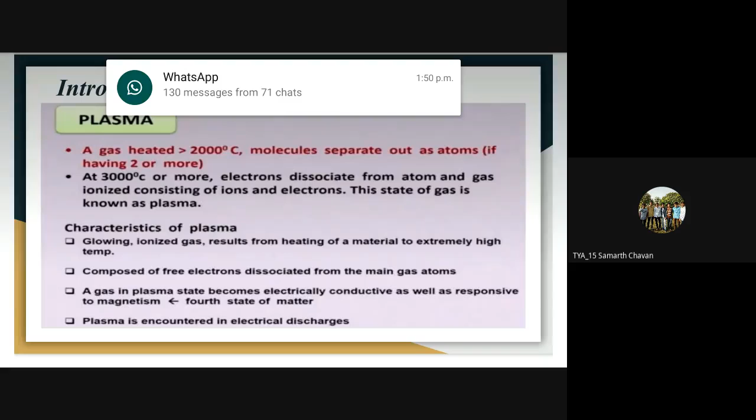If the temperature of molecules goes beyond 3000 degrees Celsius or more, then electrons will dissociate from the atoms and it will ionize. Ionization means it will consist of ions and electrons. So that state of gas is called plasma.

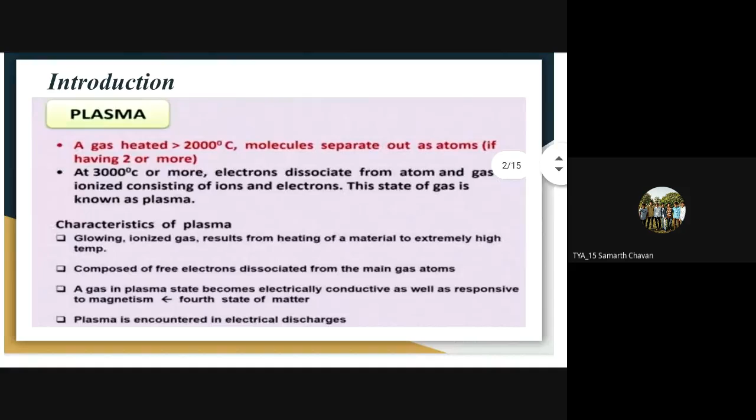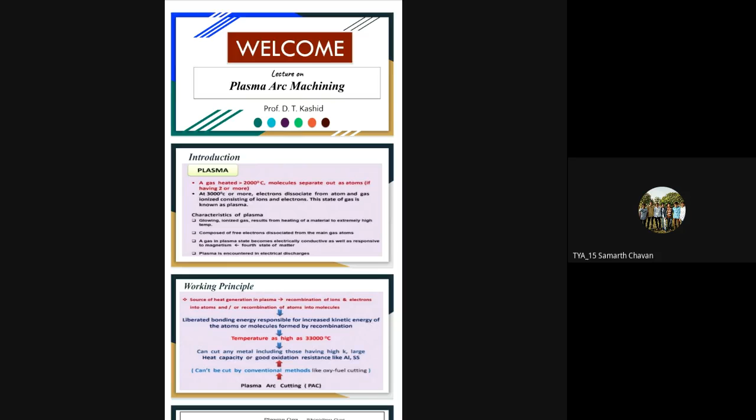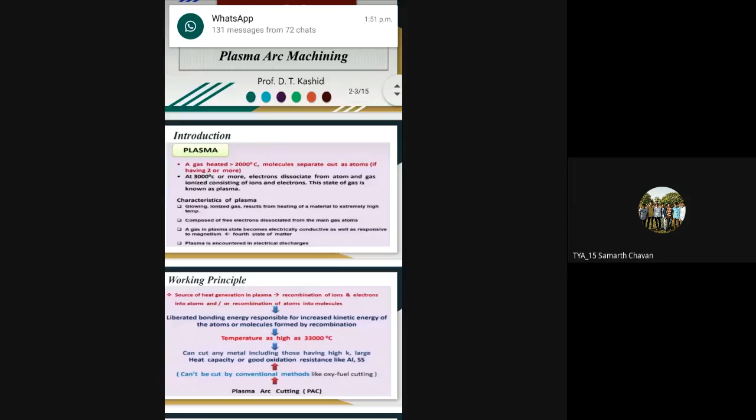Now, what are the characteristics of this plasma? It is a glowing, ionized gas, which normally results from heating a material to extremely high temperature. Plasma is normally composed of free electrons which are dissociated from the gas atoms. A gas in the plasma state becomes electrically conductive and is also responsive to magnetism.

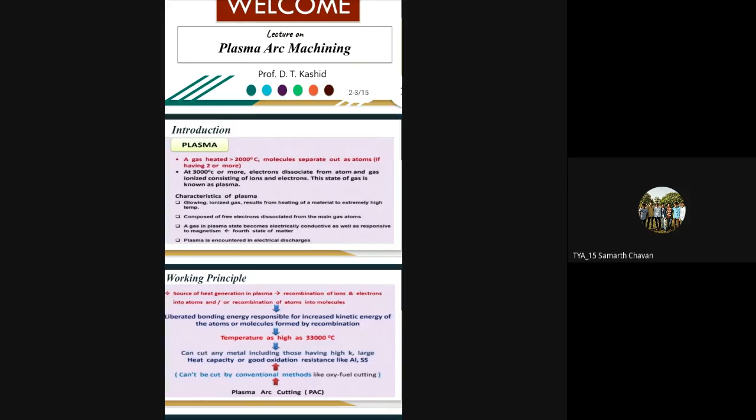This is the fourth state of matter, and plasma is normally encountered in electrical discharges.

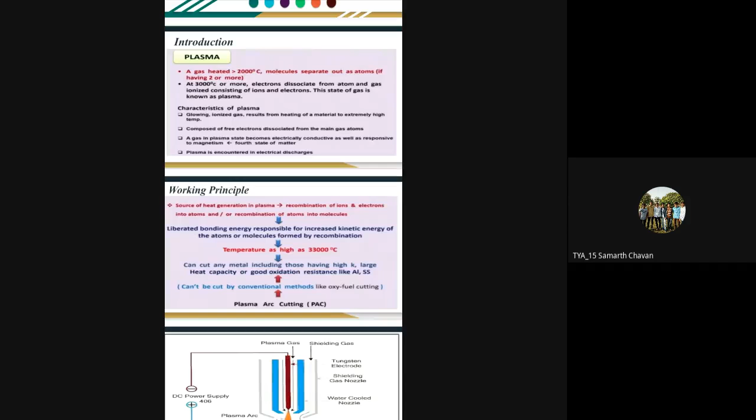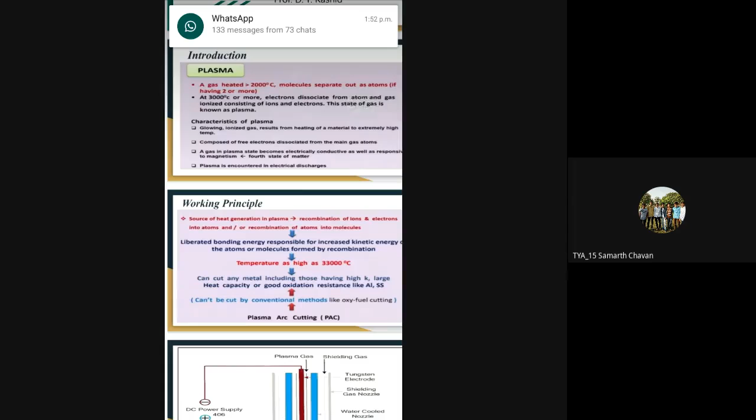Now let us look at the working principle. Normally we need a heat generation source for the plasma, and by supplying heat to the gas, you will get the plasma. The molecules will ionize and you will get ions and electrons.

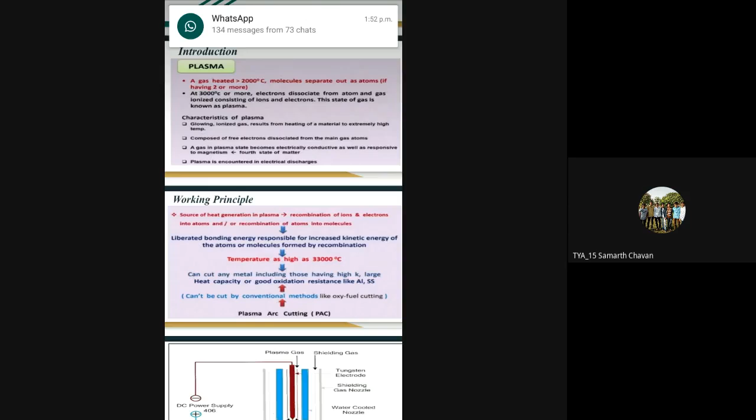That means positive, negative and neutral particles form the plasma. This plasma, having a temperature of more than 3000 degrees Celsius, can be used for cutting any metal, including those having high thermal conductivity, large heat capacity, or good oxidation resistance, like stainless steel or aluminum. So for that material, we can use plasma for cutting.

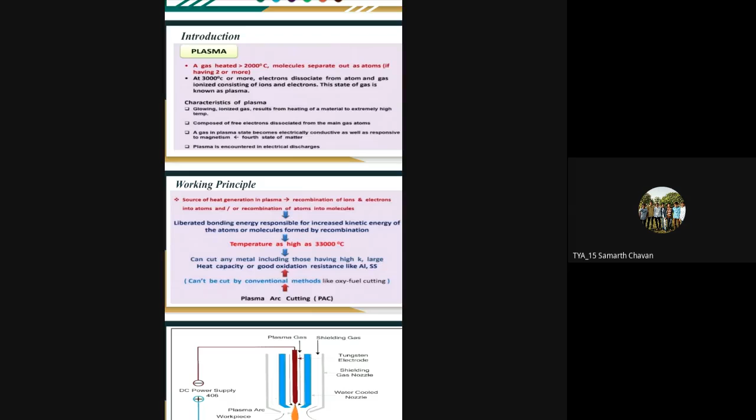But whatever workpiece material is not possible to cut using conventional methods, that material can easily be cut or machined using this plasma arc machining. Now you can see this diagram.

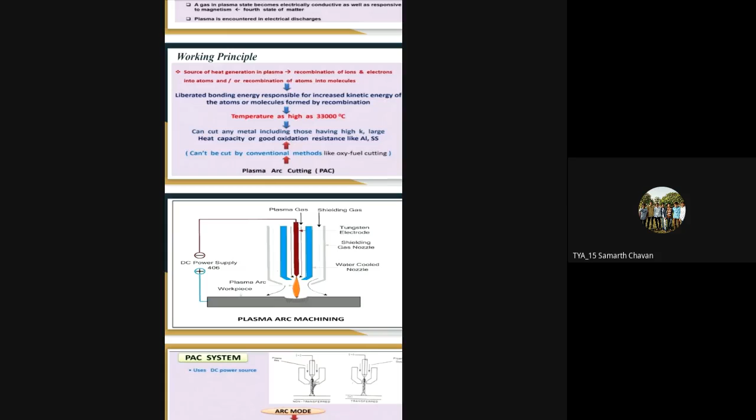We have the gas, and to heat that gas we require electrical current or electrical supply. For that purpose, the workpiece acts as an anode, and the electrode, whatever tungsten electrode is there, acts as a cathode. Then you get the gas, and that gas gives the plasma arc by hitting the molecules.

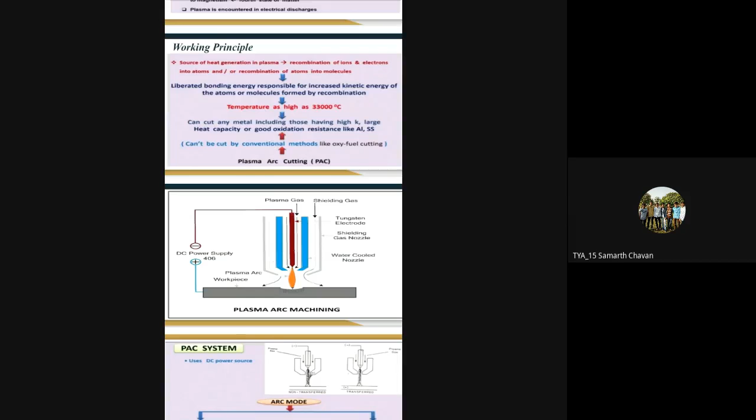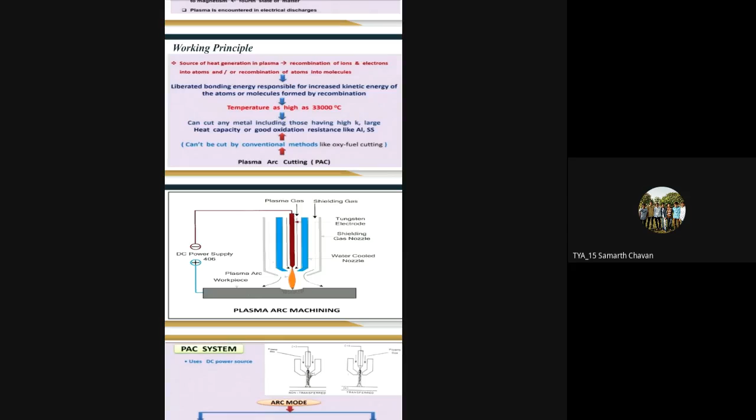Now, whatever electrodes are used, normally tungsten electrodes are used, and the gas is normally hydrogen or maybe nitrogen. Depending on that gas, your plasma arc will be generated. Again, the selection of the gas depends on the workpiece material.

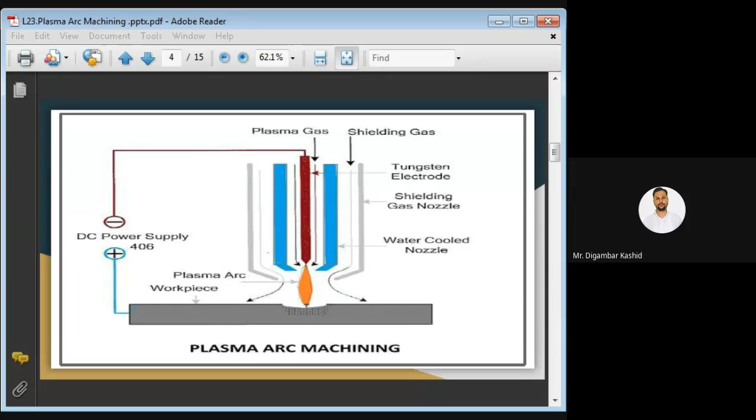Okay, now for the working principle, you can write down these steps also. How does the source of heating work in plasma? When these atoms are separated into ions and electrons, these electrons are going to recombine.

So this recombination of atoms liberates energy. That bonding energy is responsible for increasing the kinetic energy of the atoms or molecules which are formed due to the recombination of these electrons and ions into atoms and molecules.

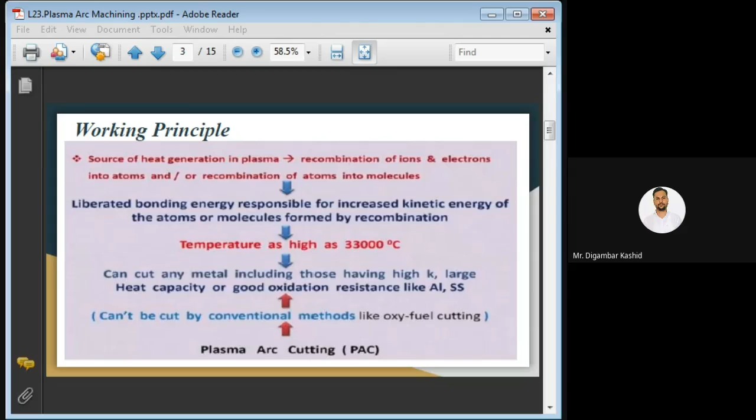Now talking about this diagram, we can see it in the diagram also.

So as we give the power supply to that system, an electric arc will develop between the cathodic tungsten electrode and the anodic nozzle. I repeat, the electric arc will develop between the cathodic tungsten electrode and the anodic nozzle.

And as the gas comes in contact with the plasma, there is a collision between the atoms of the gas and the electrons of the electric arc, and as a result we get the ionized gas.

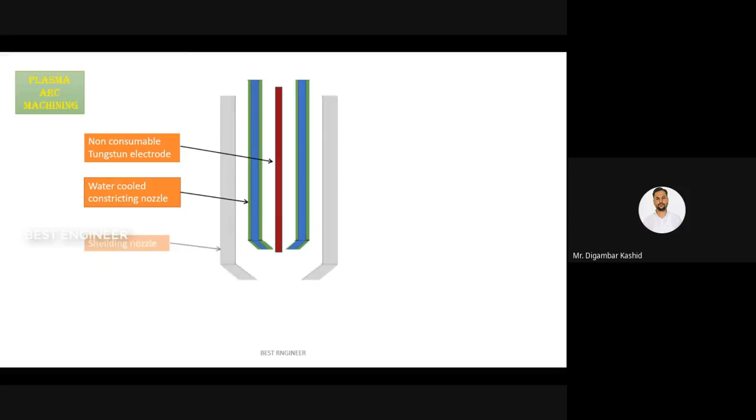So that tungsten electrode we are using, that is non-consumable.

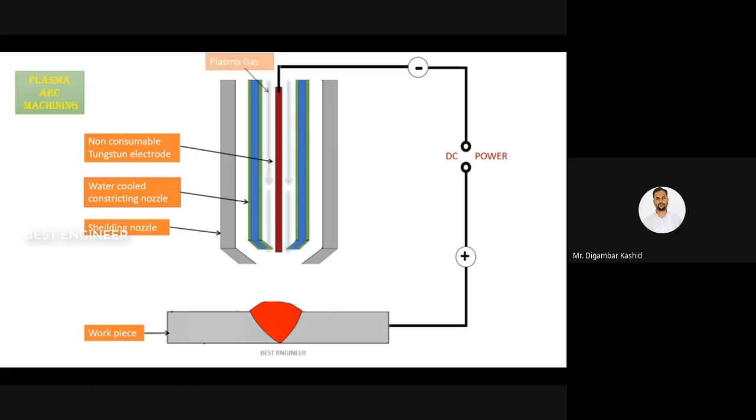And we are giving the power supply by connecting the negative terminal to that electrode and the positive terminal to the workpiece. And to prevent overheating, we have to use shielding gas and a water cooled constricting nozzle. And when your plasma gas comes in contact with the tungsten electrode, due to heating, there will be a collision between the atoms of the gas and the electrons of that rod, and you will get the plasma arc.

And then you can use that plasma arc for cutting, machining, or welding purpose.

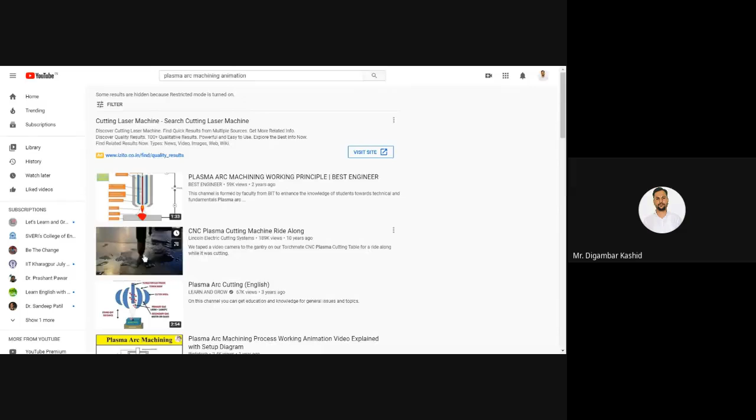This is a CNC plasma cutting machine.

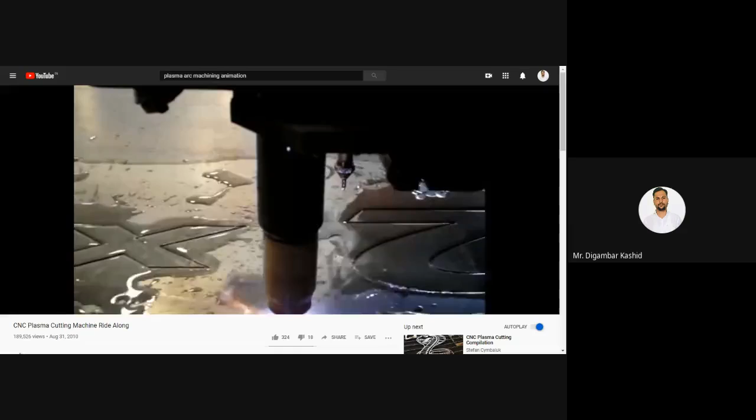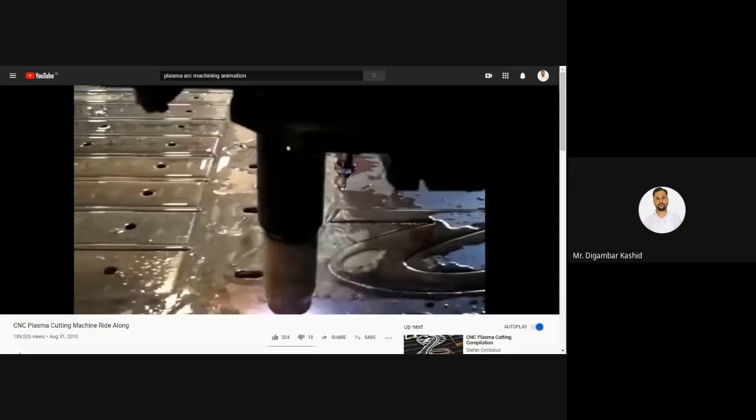Once again, I repeat, give the heat to the plasma gas. We require some heating medium or heating element, so tungsten electrodes are used.

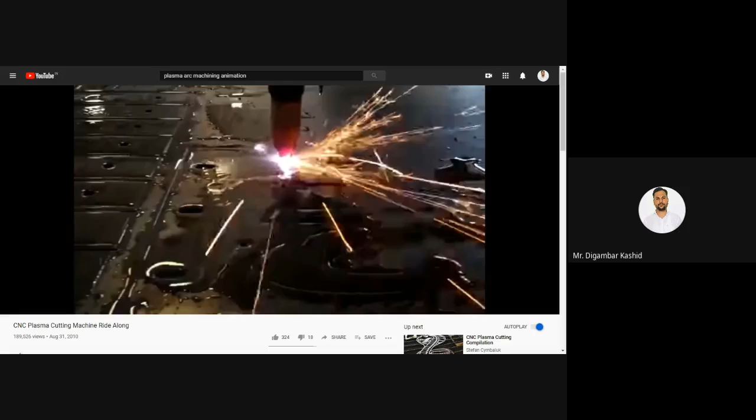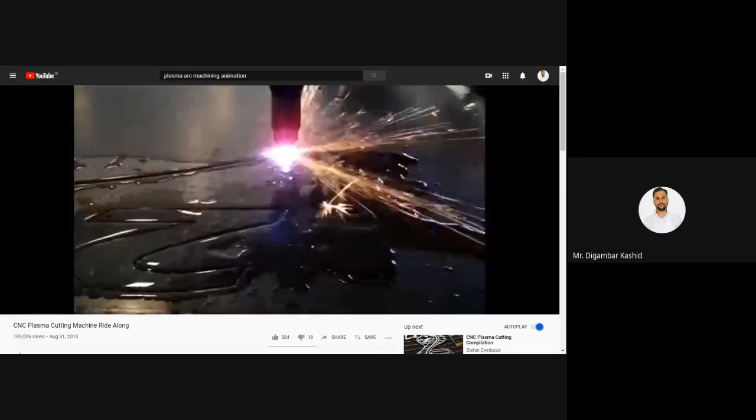Due to that heating, the molecules of the gas separate out as atoms, and those atoms again into ions. If your temperature is increased above 3000, that time you will get positive ions, negative ions, and neutral particles.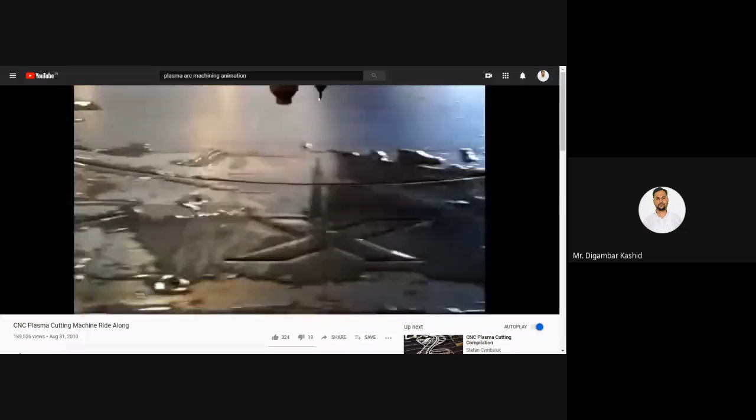So some atoms will get dissociated, and the gas becomes ionized, which consists of ions and electrons. That state of the gas is called plasma.

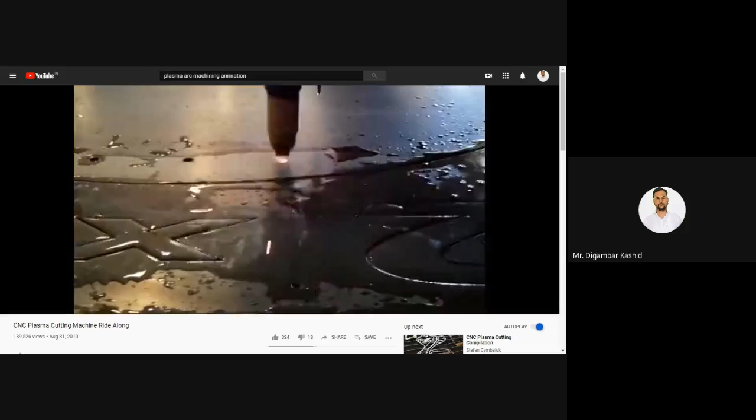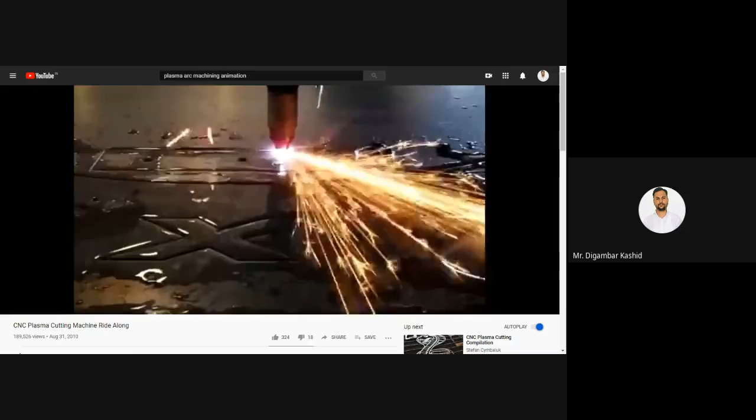Don't forget that the temperature of the plasma can be of the order of 10,000 degrees Celsius. When such a high temperature source reacts with any workpiece material, the workpiece gets melted, and maybe even vaporized, and finally cut into pieces. So many metals like aluminum, stainless steel, having high thermal conductivity, high heat capacity, or good corrosion resistance, can be cut or machined using this process.

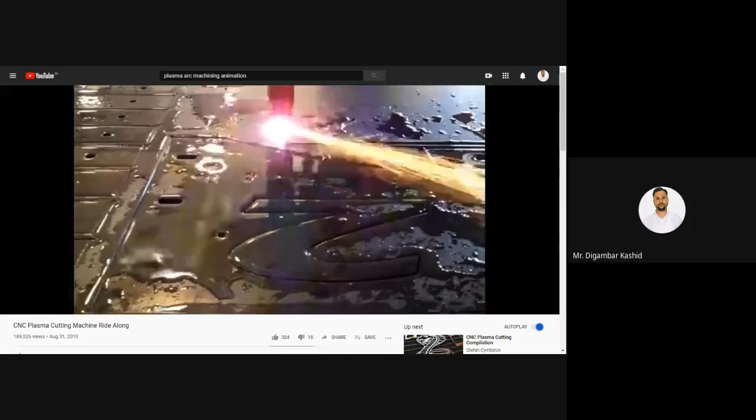As a result, such metals cannot be cut by conventional techniques like oxyfuel cutting. But these types of materials can be easily cut by using plasma arc machining or plasma arc cutting method.

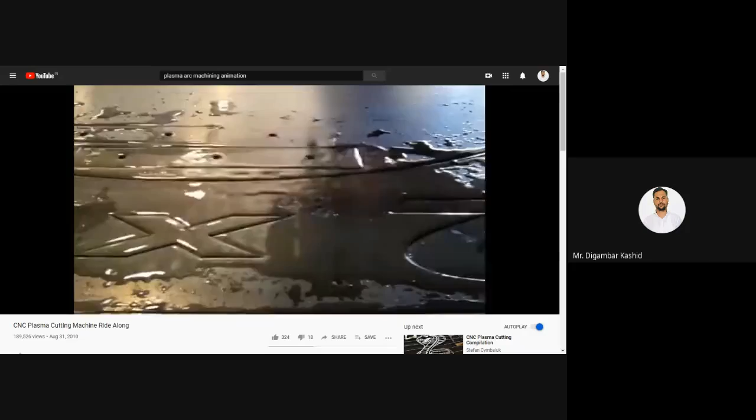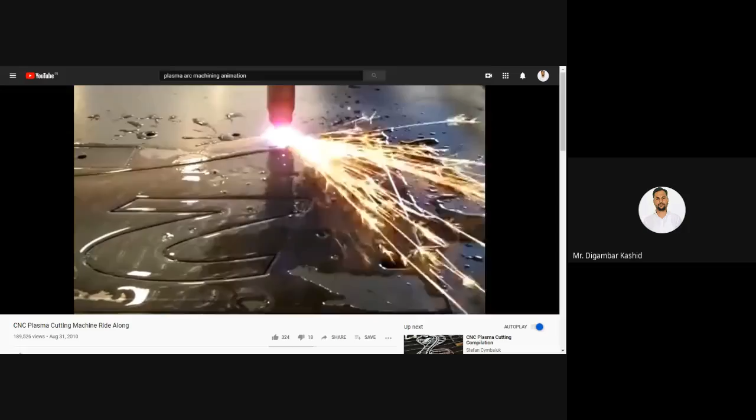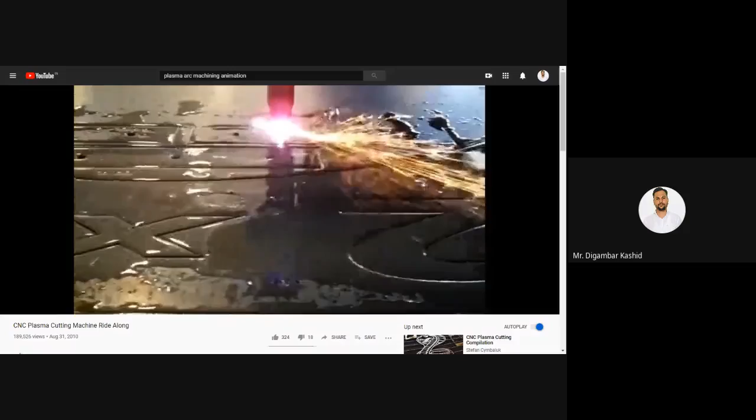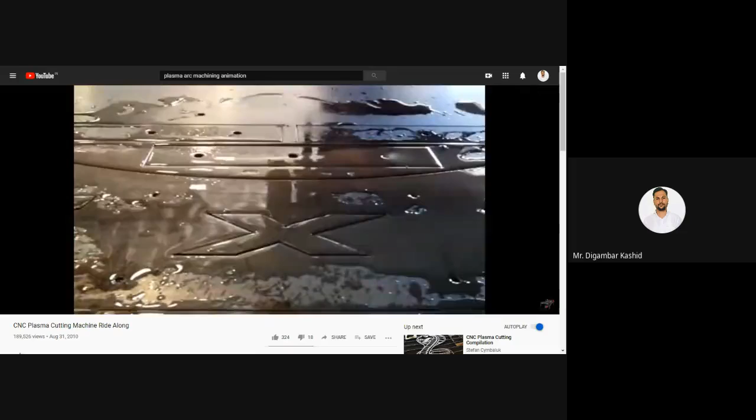For any electrothermal energy based process, material removal takes place due to melting and vaporization, due to heating to high temperature. If you take the example of EDM, or electro discharge machining, or electron beam machining, or laser beam machining, or plasma arc machining also, for each and every process the melting and vaporization is taking place due to the temperature, the heat energy.

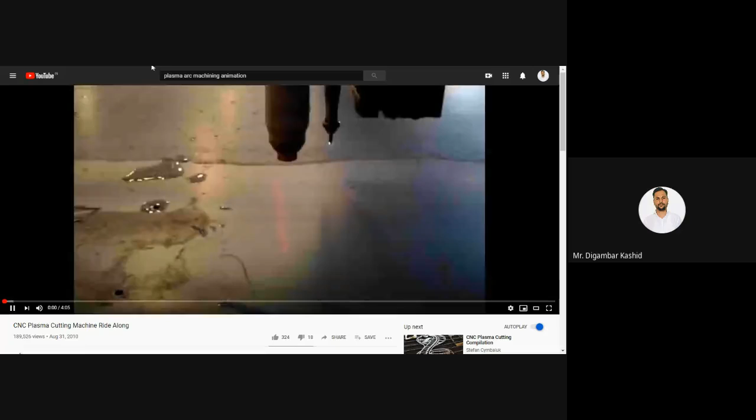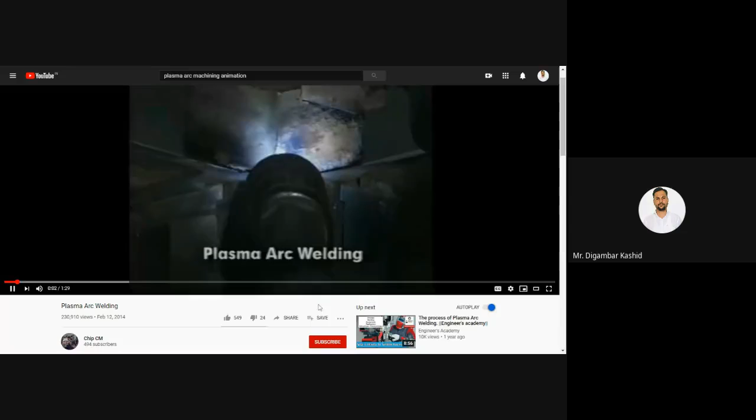Now this is a plasma arc welding process.

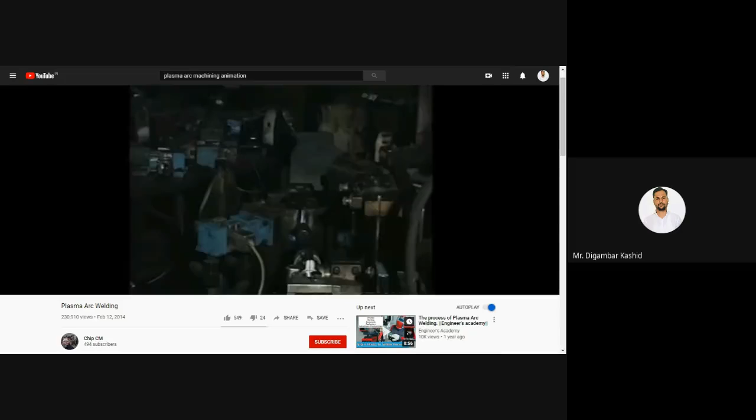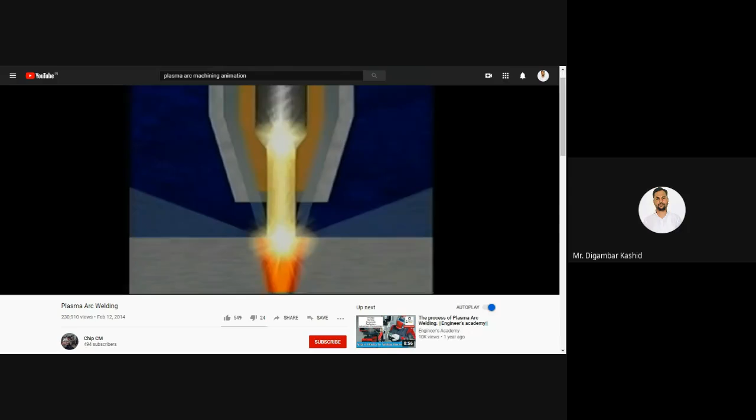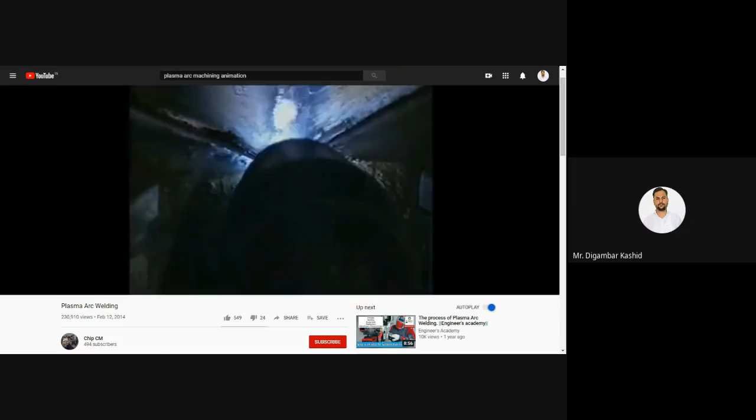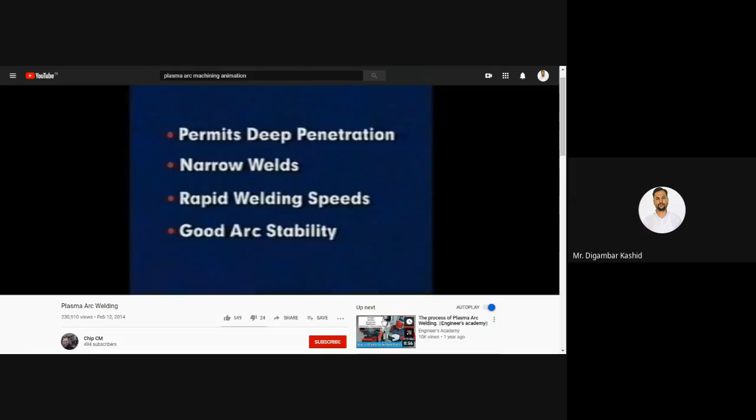So plasma gas may be argon or hydrogen, we can use. But the electrode is non-consumable, that is tungsten. Don't forget.

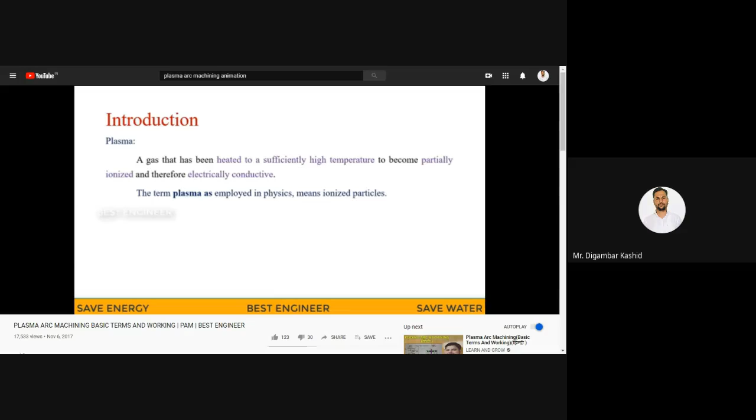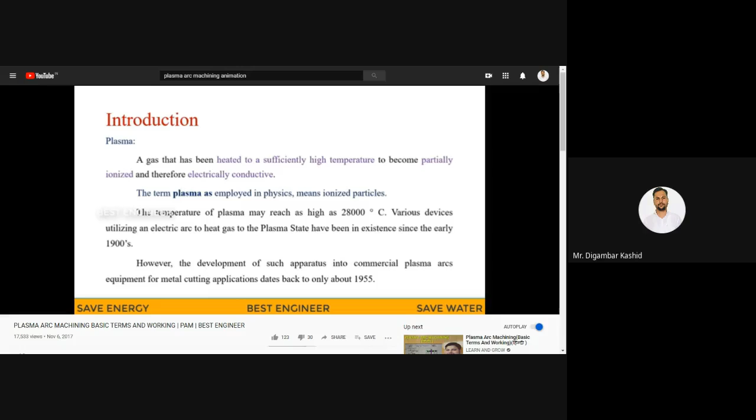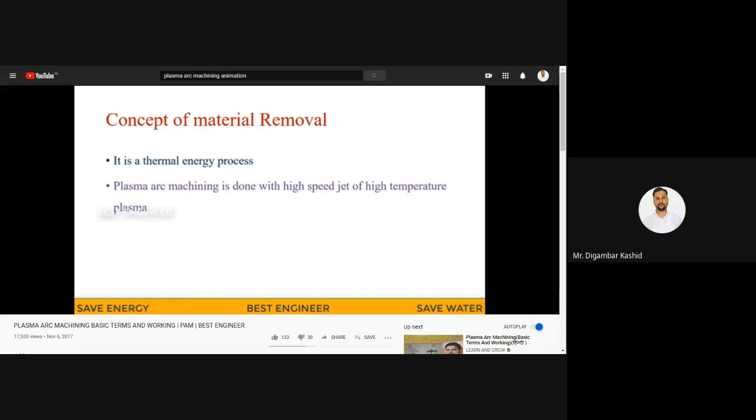As I have mentioned, the concept of material removal: here thermal, that heat energy, is required. So it is a thermal energy process. And to cut, we require the high velocity jet of high temperature plasma.

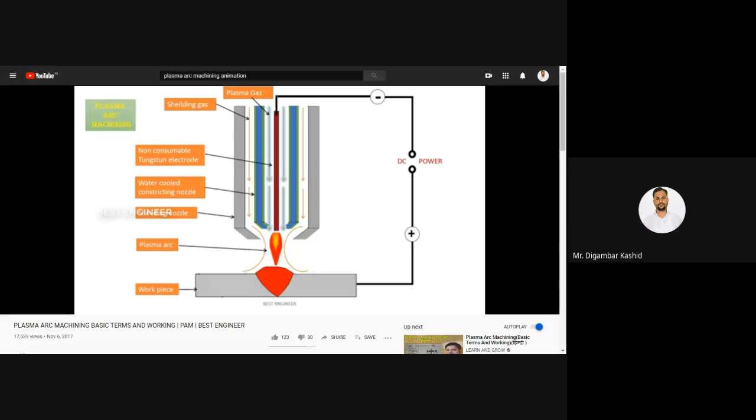Due to that constricting nozzle, you can easily target your workpiece. So in that small region, through that region only, you pass your plasma gas.

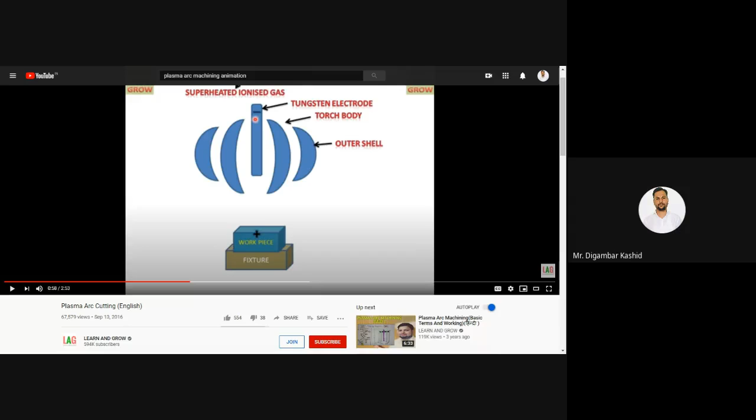There will not be any contact between your workpiece and the plasma -- not flame, plasma.

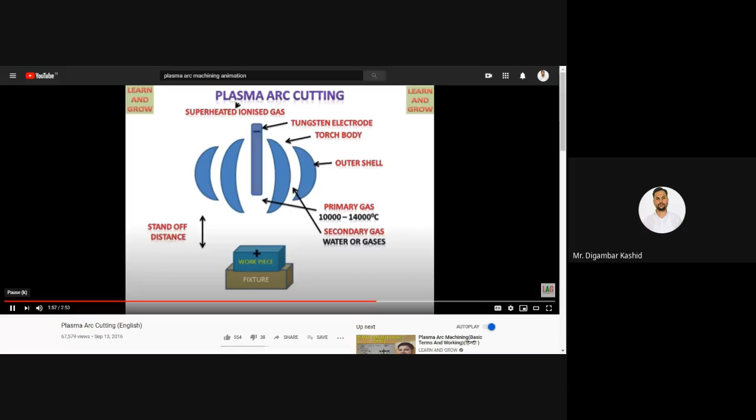The heating of the tungsten means rising temperature. So you will ionize the plasma gas. And then you will get the plasma arc, and then you can target your workpiece, and material removal will start.

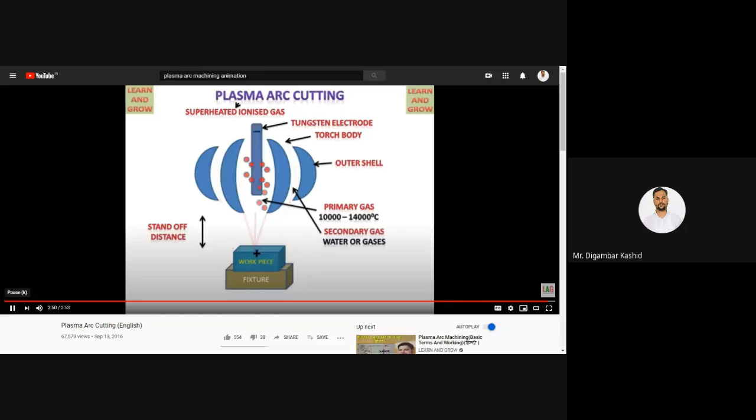So I think you got just the idea about the plasma arc cutting. In the next lecture, we are going to talk about the plasma arc system, one by one elements -- what is the role of the torch and everything.